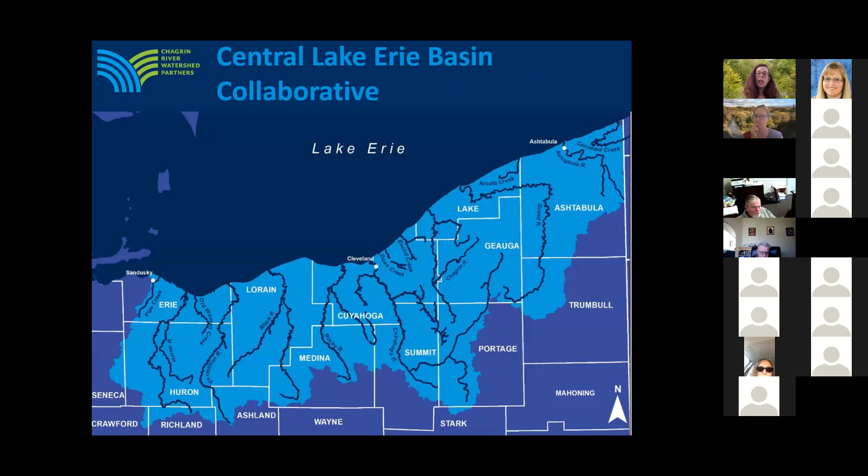CRWP really benefits from our trusted relationships with our member communities. Part of the reason we've been able to establish these trusted relationships include the following.

The first point is that CRWP is structured with a community membership model. Each of the members in CRWP have a seat on our board of directors. We've also been working with most of these communities for more than 20 years. For some communities we've been working with since our founding 25 years ago.

We work closely with a variety of city, county, and village and township departments, including mayors, councils, planning and zoning boards, the legal departments, the engineering staff. So we have a broad view of various perspectives in each of the communities that we work in. Many of our communities consider us technical experts, and they involve us in development and conservation decisions.

CRWP maintains a suite of model codes covering a variety of topics. If you're not familiar with the term model code, a model code is an example ordinance or zoning resolution that is a starting place for communities to use to enact their own regulations.

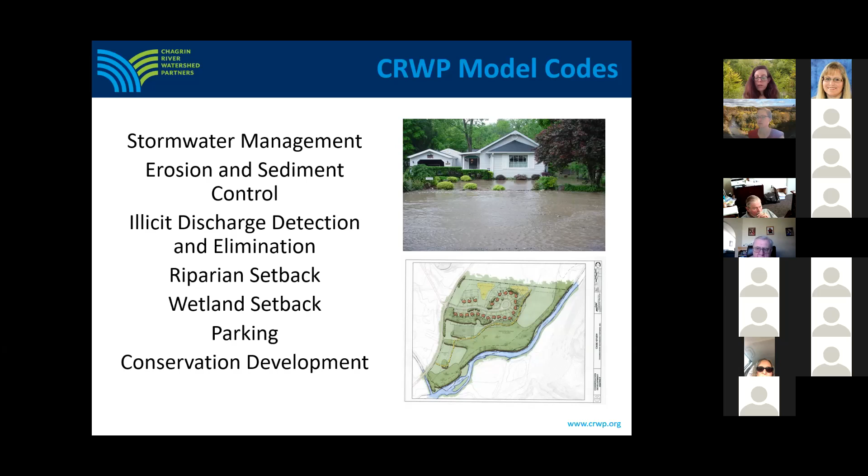Let me provide a little bit more detail about our conservation development code. If that's not a term that you're familiar with, it's a style of development that helps preserve open space by using a different distribution of lots. So instead of having a little bit of open space on each lot, as would be the case in a traditional development, the lots in a conservation development are smaller, and then there is a larger area of pooled open space.

This style of development results in less infrastructure to maintain. It can be done through a planned unit development code or as a zoning overlay. If you're interested in this, I suggest you check out our model code.

You may be wondering, why does CRWP have a parking code? What does that have to do with streams or stormwater management? Well, there's a direct relationship between the amount of parking that is required in your community and the amount of impervious surface in your community.

So we developed a model parking code that includes language that communities can use to make sure that their existing regulations are allowing for permeable paving materials, shared parking, and land banking. And if land banking isn't a term that you're familiar with, that means allowing land to be set aside so that it can be used in the future as parking if needed, but in the meantime, it can be natural vegetation or a landscaped area.

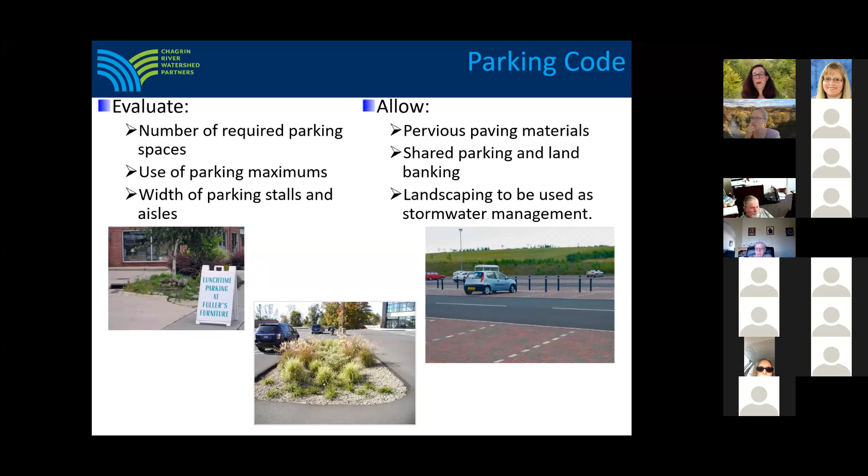We also suggest that communities look at the number of parking spaces that they are requiring to make sure that they are not requiring more parking spaces than are really needed, and to consider the use of parking maximums and consider reducing the width of parking stalls and aisles to reduce the amount of impervious cover in the community.

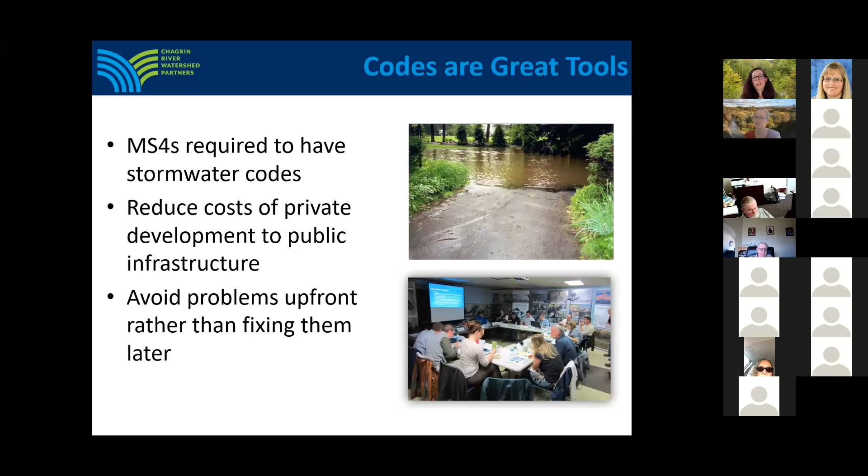CRWP thinks that codes are great tools. You can use them to reduce the costs of private development to public infrastructure and to avoid problems upfront rather than fixing them later. Furthermore, if you're an MS4 community, you're required to have stormwater codes anyway, so you might as well make them do as much work as possible for your community.

Speaking of requiring to have stormwater codes, if you're an MS4 community, you should be aware that you need to update your comprehensive stormwater and erosion sediment control codes by April 1st of 2022. How would you know if you need to update your code? Well, if you're using our model, you should update your codes. If you're not, here are some other things to consider.

The latest construction general permit changed the water quality volume. It increased from 0.75 to 0.9 inches, and there is now a new water quality volume calculation, which appears on your screen. If your old code has the old water quality volume and the old calculation spelled out in it, you need to update your ordinance to be compliant with the new MS4 permit.

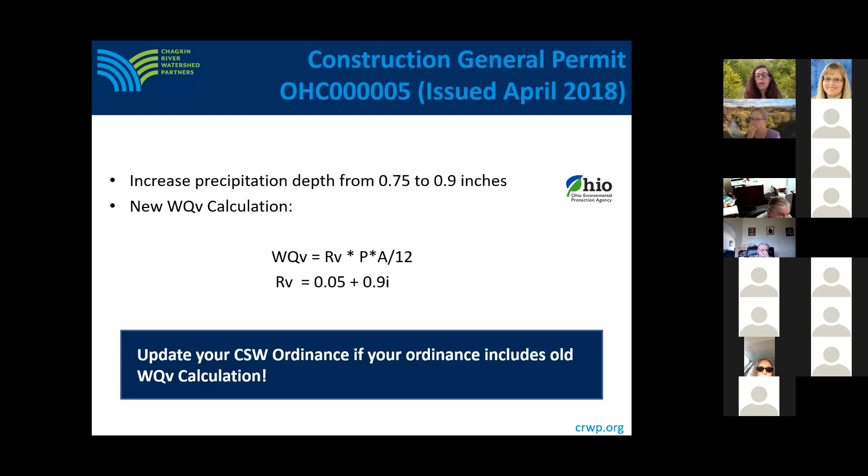Generally, if you spelled out everything in the construction general permit in your ordinance, you probably need to do updates to both of your codes to be compliant. If you didn't, here are some other things to think about. These are some general guidelines for what your erosion sediment control and stormwater codes need to have in them to be compliant with MS4 permits.

Your ordinance needs to allow you to require submission of a stormwater pollution prevention plan that meets the requirements in the construction general permit. At least you can go above that, but it needs to meet those requirements. It needs to give you the authority to inspect those sites. It needs to ensure that there is a mechanism so that inspection and maintenance will continue for the stormwater control measures that are required to be designed and installed.

You have to make sure that your ordinance says that not only do you have to come up with a plan, but those BMPs and SCMs actually need to be installed and functioning on the site. Your ordinance needs to have enforceable requirements and timelines, and you need to have penalties for noncompliance. If you don't think your ordinance has any of these things, then it's probably a good idea to revisit it and update it this cycle.

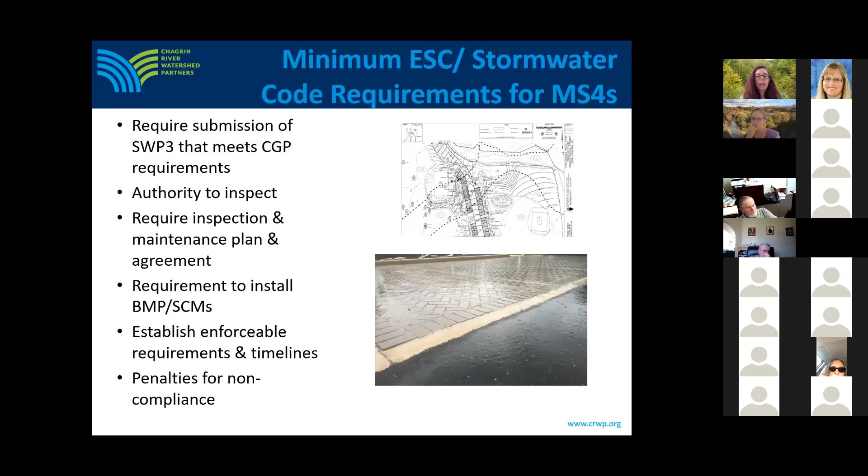So one tool that you can use to help you with that update is CRWP's Model Comprehensive Stormwater Code. Ohio EPA recommends the use of this model code for phase 2 compliance, and it's widely used throughout Northeast Ohio.

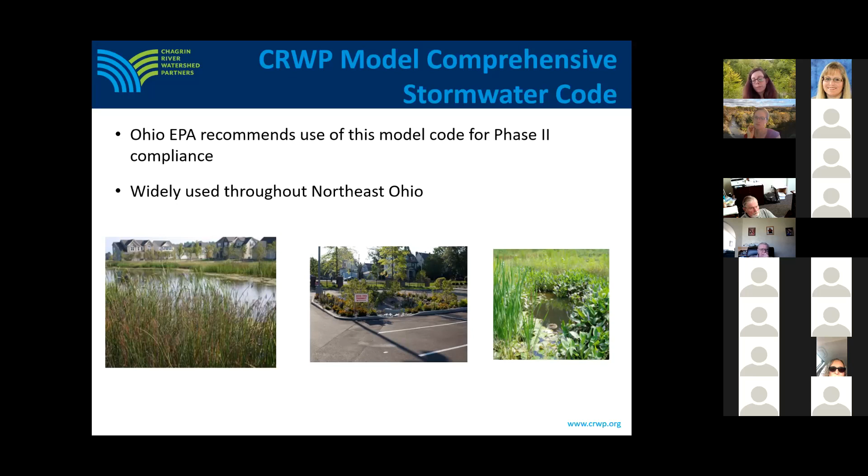This model was first issued in 2004 with updates each permit cycle since then. It's a collaborative effort of CRWP, Cuyahoga, Lake and Geauga Soil and Water Conservation Districts, and CRWP member communities, and has also benefited from insight and comments from ODNR and Ohio EPA. The early versions of this code were informed by John Aldridge, a consulting engineer.

The purpose and scope section is a brief overview of the overarching objectives of the legislation. The definition section in our model code now references all of the definitions in the construction general permit, and then we define additional key terms in the ordinance that are not defined in the construction general permit. We also define the construction general permit, since we're now using that term to reference Ohio EPA's construction general permit for our code. We include a disclaimer of liability and conflict, severability and nuisances, and responsibility section.

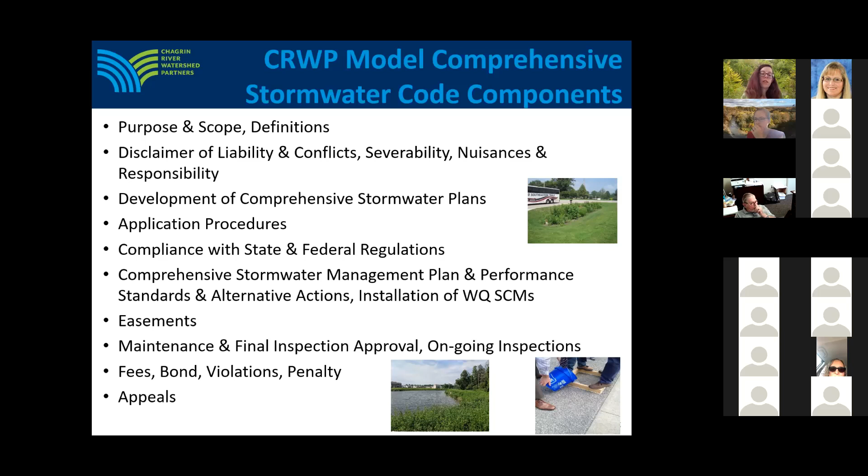Our model ordinance addresses both water quantity and water quality. So a lot of what I discussed so far deals with water quality, but our ordinance also has language about conveyance. Our ordinance states that open channel conveyance is preferred whenever possible, and it does have some language about storm sewer sizing for sites for which open channel conveyance is not feasible.

We also have stream crossing standard language that includes things like bridges shall be the preferred crossing for high quality sensitive streams. Our code also requires an inspection, maintenance agreement, and plan.

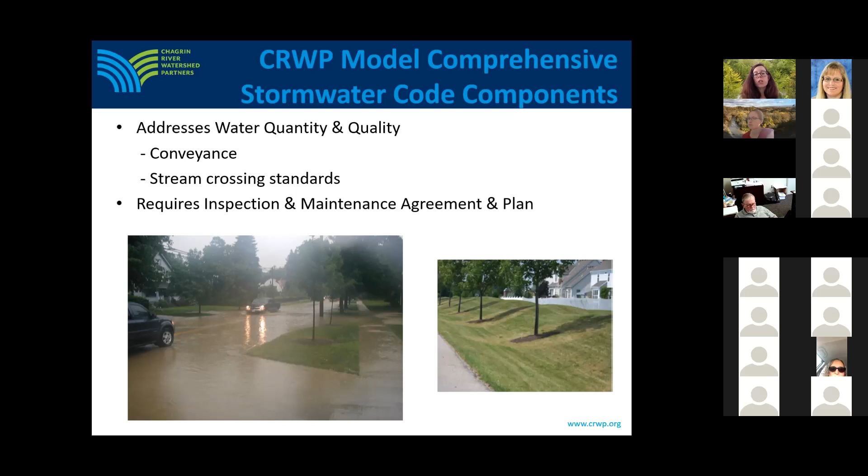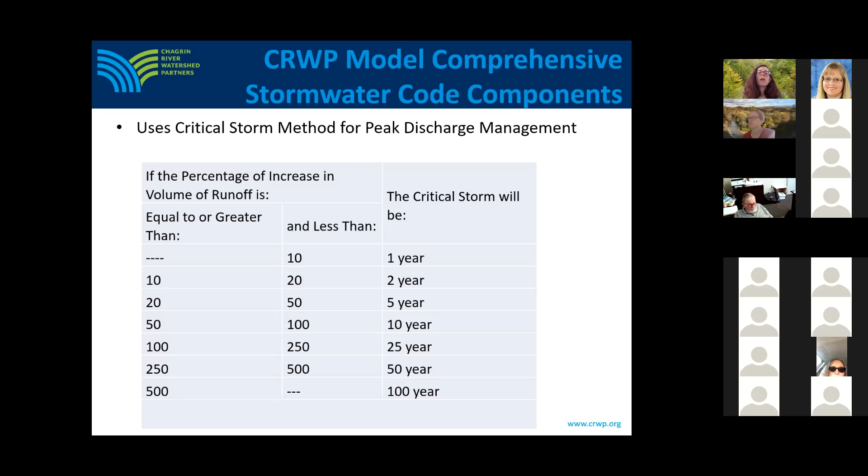Our code uses the critical storm method for peak discharge management. For anyone not familiar, this is a method that was published in ODNR's Stormwater Manual in 1980 that states that the peak discharge post-development shall be no greater for the critical storm, and every more frequent storm should be no greater than the pre-development 1 year 24-hour storm. The critical storm is determined by how much the volume increases post-development relative to pre-development.

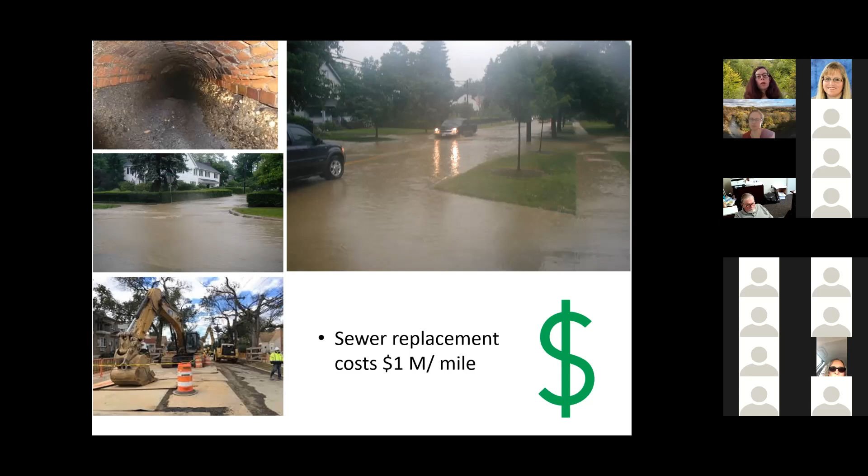Many communities feel like this is cost effective because other strategies such as storm sewer replacement can be very costly and very disruptive to communities. Furthermore, some communities, even if they're not currently having flooding problems, would like their storm systems to be as robust as possible because they've seen an increase in the amount and frequency of heavy storm events.

This slide shows data from the Great Lakes Integrated Sciences and Assessment Center, or GLISA, that shows that the period of 1981 to 2010 relative to the period of 1951 to 1980 saw a 22% increase in the amount of rain falling in the heaviest rain events and a 16% increase in the number of the heaviest rain events.

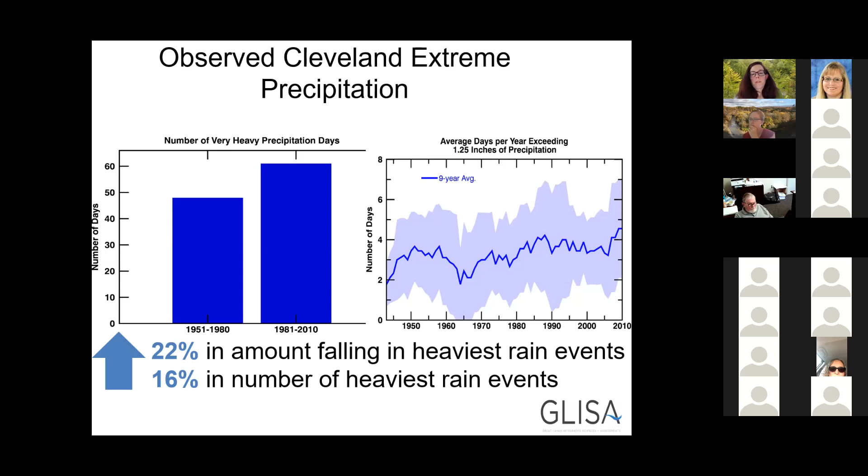One way you can get more stormwater management done on private property using your code is to require stormwater control measures for post-construction for sites disturbed less than 1 acre. This map shows a visual representation of how that could add up if each of these parcels are less than 1 acre, and as they're redeveloped with a stormwater control measure added in, you're getting that much more work done and that much more stormwater storage in your system than you had before.

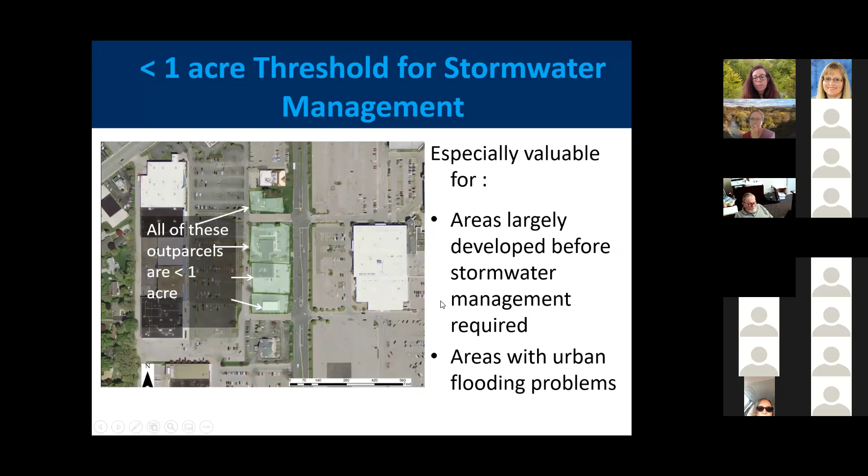If you're wondering has anybody else required stormwater management at less than the 1 acre threshold, the answer is yes. Locally, the city of Willoughby Hills and the city of Aurora, Ohio both require that all industrial and commercial development that requires a site plan complete a comprehensive stormwater management plan and install stormwater control measures. Additionally, the city of Lakewood requires a comprehensive stormwater management plan for site disturbance greater than 8,000 square feet. Nationally, there are many communities that have even lower thresholds at which stormwater control measures are required.

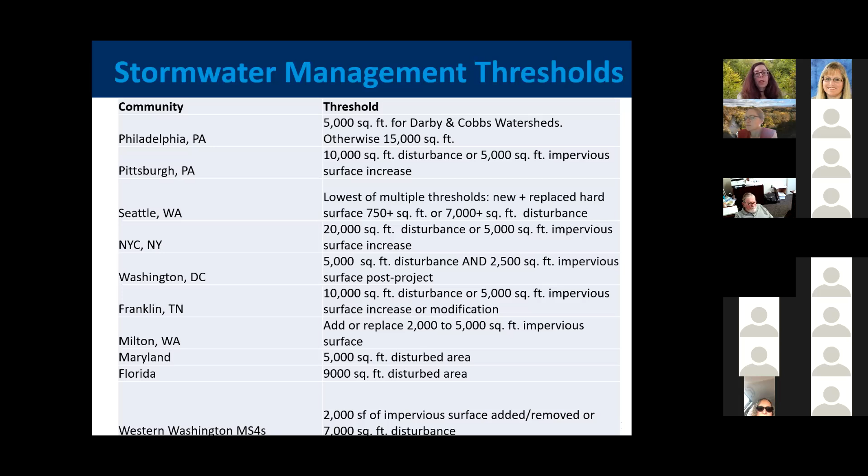At the stage of the draft MS4 permit, Ohio EPA was considering giving communities only 6 months to update their codes, and we know it's very difficult for communities to complete ordinance updates on those timeframes. So we wanted to make our code such that it minimizes the amount of updates required in the future. Another benefit is that there will no longer be a lag between changes to state and local regulations. For example, right now in a lot of communities, local regulations say you must manage a water quality volume of 0.75 inches of rain, whereas state regulations say 0.9, and this change will automatically make those types of changes consistent.

Another change we made to our code was including something in our performance standards section that will meet the requirement for MS4s that have TSS and nutrient TMDLs for MCM5 by requiring green infrastructure where feasible. Communities that have total suspended solids or sediment or any nutrient TMDL are required under this MS4 permit to do one of 4 things.

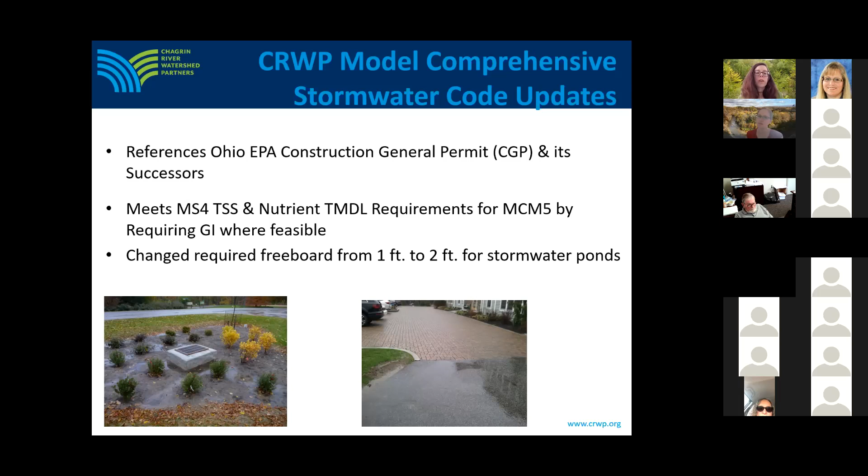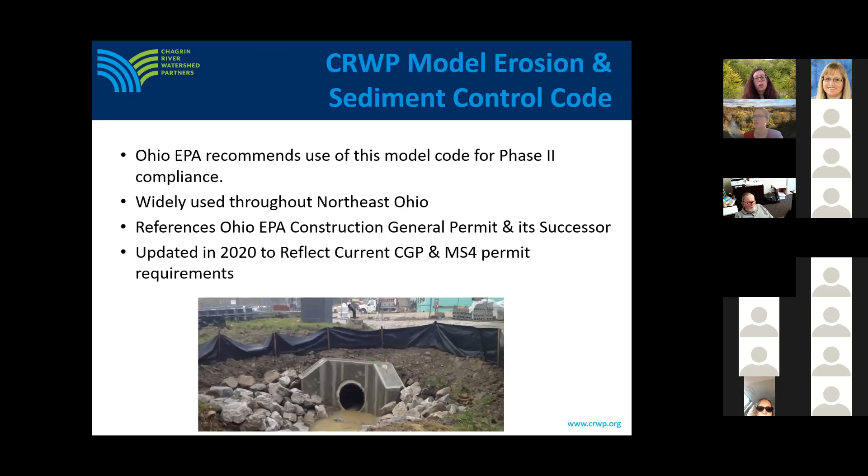Now moving on to our model erosion and sediment control code. Like the comprehensive stormwater code, Ohio EPA recommends the use of this code for phase 2 compliance. It is widely used throughout Northeast Ohio. It now also references the Ohio EPA construction general permit and its successors, and it was updated in 2020 to reflect the current construction general permit and MS4 permit requirements.

The first version of this code was issued in 2001. It's a collaborative effort of Chagrin River Watershed Partners, Lake Soil and Water Conservation District, and member communities. It's been reviewed by Ohio EPA for phase 2 compliance, and like our comprehensive stormwater code, this code has really benefited from suggestions and insight from all of our collaborators on the code.

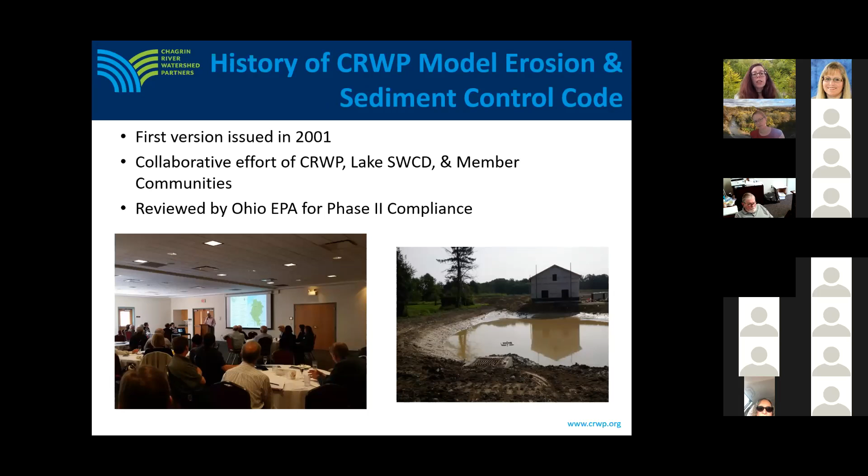We have an applications procedures section that states that a pre-application meeting is required and the submittal requirements.

We have a section on compliance with state and federal regulations that requires that the plan include evidence that the site has submitted its NOI for construction general permit coverage and has any needed 401, 404 isolated wetlands and ephemeral stream permits from Ohio and the Corps, as well as compliance with the dam safety regulations if applicable.

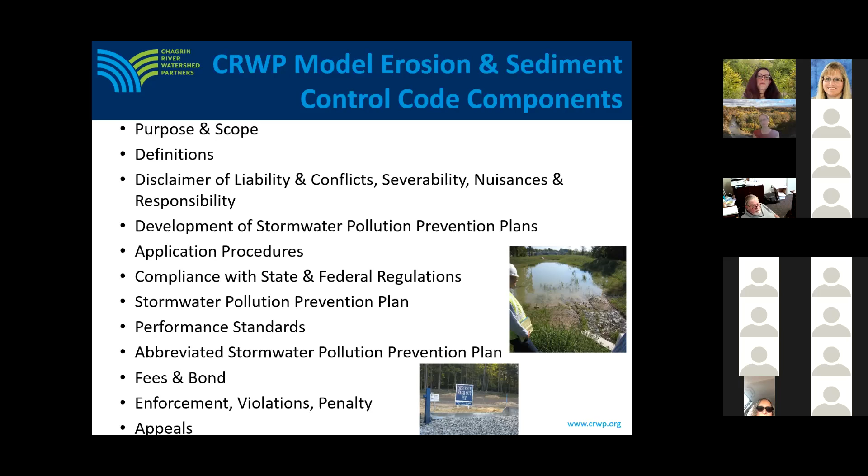We wanted to make it easier for communities to have to do updates less frequently, and we wanted consistency between local and state regulations. Our code now also includes mechanized clearing as a trigger for a SWP3, and we removed the agricultural exemption. We did this because we learned that some soil and water conservation districts were treating mechanized clearing as a silvicultural harvest under the agricultural rules, whereas Ohio EPA considers mechanized clearing to be the first step in the development process. So we changed our code to align with Ohio EPA's guidance.

We also added that property owners need to submit a SWP3 for offsite support facilities, such as spoil locations or asphalt plants, before they start using such offsite support facilities.

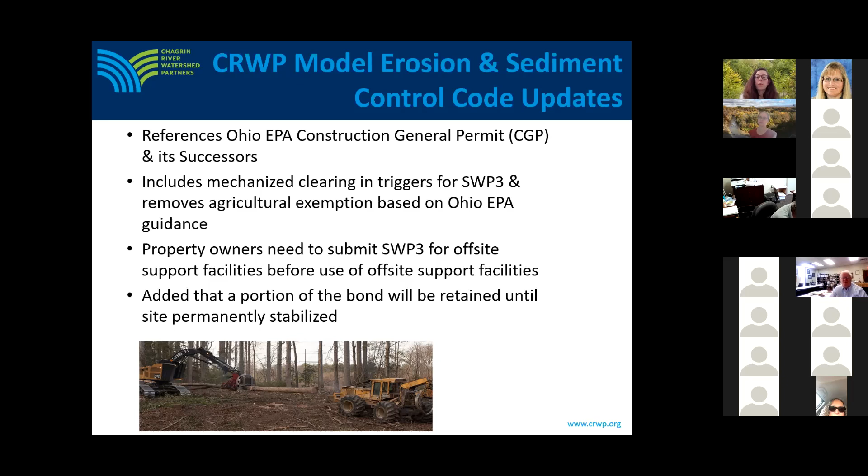We also added a section in our code that relates to the requirement in the MS4 permit that MS4s need to conduct inspections every 14 days instead of monthly if sites have certain deficiencies. Those deficiencies are: construction activities have started at the site with no SWP3 completed, or the property owner has failed to install the sediment basin when the SWP3 clearly indicates that should be the first step, or they have failed to implement any sediment or erosion controls, or dewatering activities are resulting in turbid discharges.

And because MS4s now have to inspect those sites more frequently, we added language in our code that allows MS4s to pass those costs on to the property owner by having them pay a $250 additional fee for each additional inspection conducted because of those issues on the site.

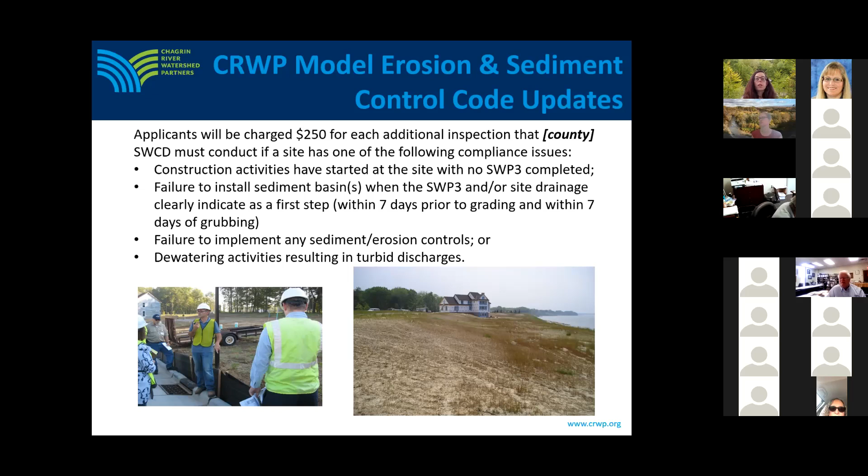The last code I'm going to be covering in detail today is our Riparian Setback Model Code. As a reminder, riparian setbacks count as a post-construction BMP under MCM 5 for phase 2 compliance for MS4s.

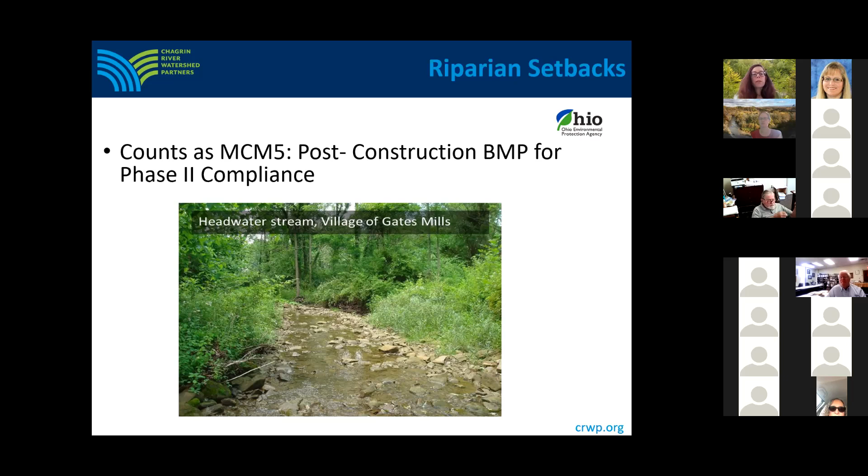I'm going to begin by reminding all of you of some of the services that healthy riparian areas provide. Healthy riparian areas have root systems for trees and bushes that help hold stream bank soils in place, limiting stream bank erosion. They also help reduce downstream flood impacts by slowing water velocity and enabling water to soak into the ground on the floodplains.

They filter and trap sediment, nutrients, chemicals, salts, septic discharge, and other pollutants, protecting surface and groundwater quality by acting as filters. They influence temperature by providing shade, which is particularly important for cold water streams but important for all streams. They help reduce aquatic nuisance species and enhance wildlife habitat and biodiversity.

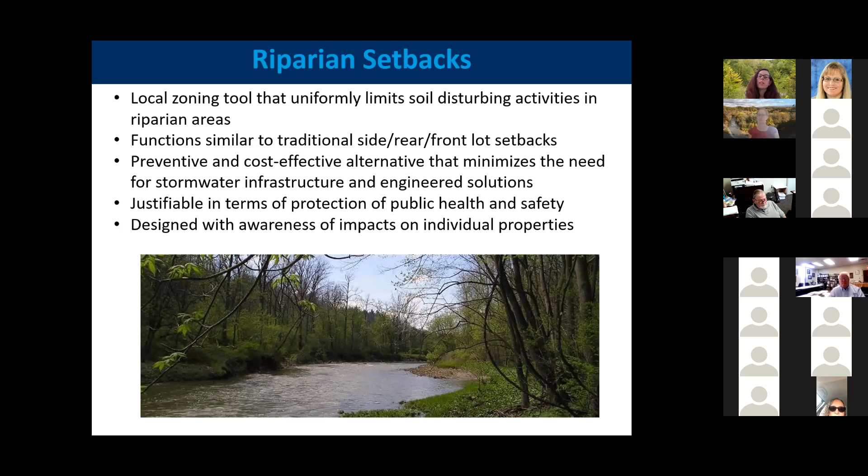I'm sure many of you are aware of situations where houses have been built too close to streams and structure flooding and potentially loss of life have resulted, or structures have been endangered because of stream bank erosion.

But adopting riparian setbacks allows communities to maintain the free services that riparian areas can provide as land is being developed. So communities with riparian setbacks continue to get benefits for flood and erosion control and water quality improvement, even as development occurs. They lower the cost to residents and communities by keeping homes and other infrastructure out of the path of ever-changing streams, as well as reducing public health and safety concerns from flooding and structural damage from erosion.

Sometimes communities worry that implementing riparian setbacks will lower property values in their communities, but the research shows that is not true. In fact, some studies show that implementing riparian setbacks actually increases property values in a community.

Our model setbacks are based on the drainage area of each stream. A stream that drains less than a half square mile and has a defined bed and bank has a 25-foot setback measured from the edge of the stream outward in both directions. Streams that drain between a half mile and 20 square miles have a 75-foot setback, and streams that drain between 20 and 300 square miles have a 120-foot setback.

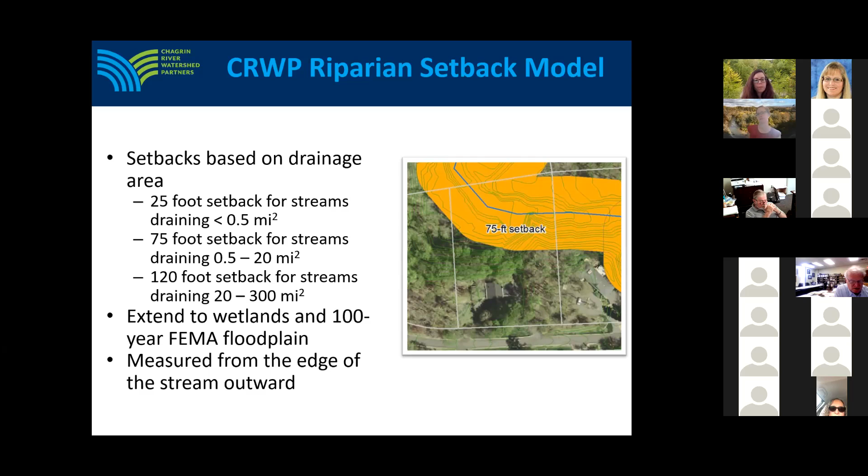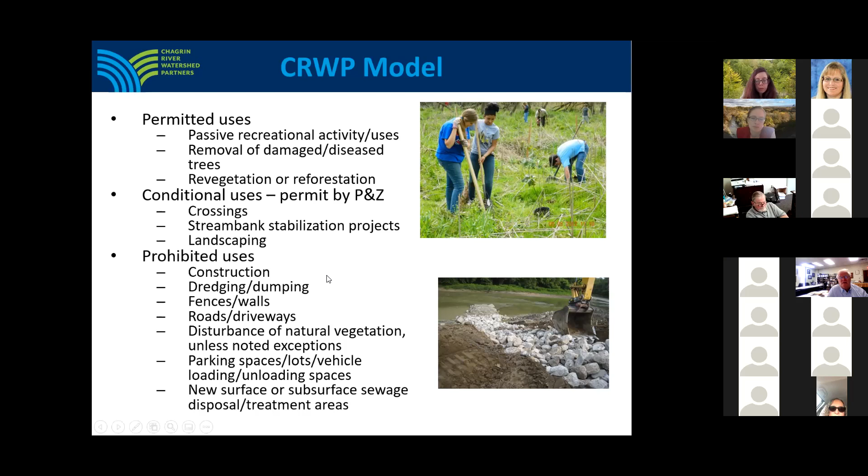Our model includes a listing of activities that are permitted, prohibited, and conditional uses under this regulation. So for example, riparian revegetation, the top picture, is a permitted use, whereas a stream bank stabilization project, such as installing a bendway weir, would be a conditional use that could be reviewed and approved with a permit from Planning and Zoning Commission.

Our model does not apply to existing structures that were in existence prior to the riparian setback being in place. Sometimes people worry that it's going to require houses that are already too close to streams to be torn down, but that's not the case. Those existing uses are grandfathered.

We do recommend that communities provide variances to other setbacks first, so that they would first flex side, front, and rear setbacks to maintain the riparian setbacks.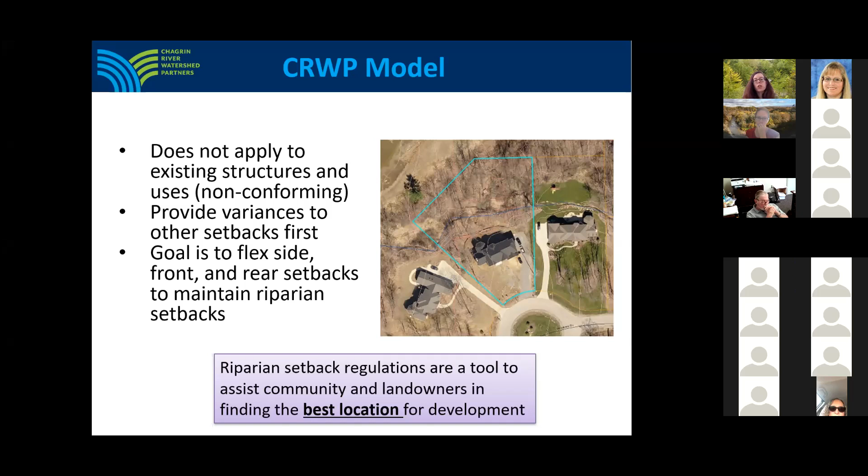This slide provides a little bit more detail about how pre-existing buildings and structures are affected by riparian and wetland setback regulations using our model.

Our model would allow expansions of homes that don't encroach further into the setback, but if a property owner wanted to encroach further into the setback with an addition, that would require a variance.

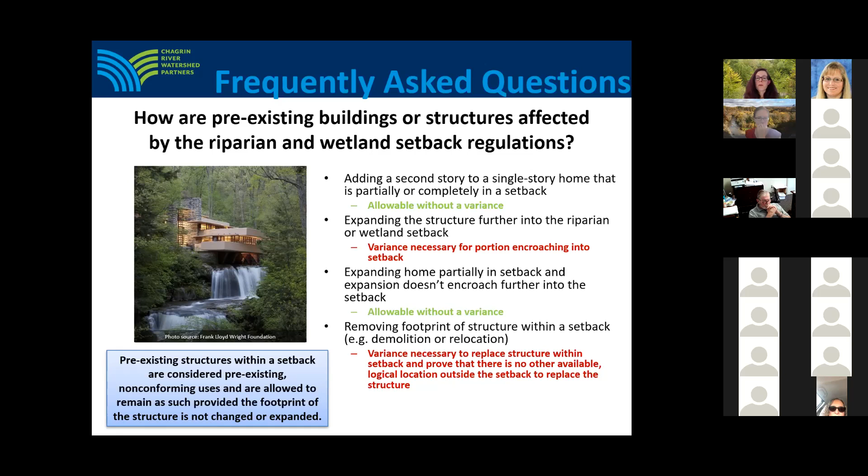If a property owner tore down their home and wanted to build a new one, they would need a variance to put that structure back where it was if it was within the riparian setback. And they would need to show that there was no other logical location where the new home could be built on the parcel in order to get that variance.

We suggest that communities use the best available data when creating those maps, but also include language indicating that the map is a guide only and field conditions always prevail. We suggest that communities update their maps as needed if they become aware of discrepancies between field conditions and the maps.

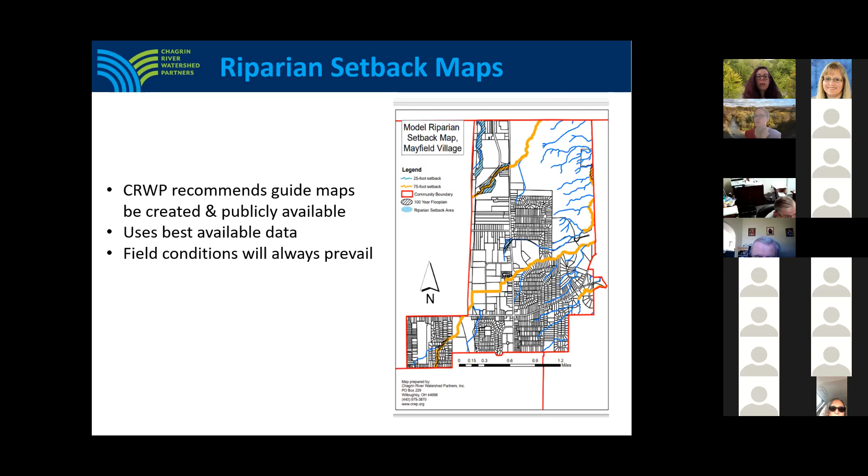I'd like to thank you again for the opportunity to present to all of you today, and I'd like to take any questions at this time.

Keely, there's a question in the chat: is the amount of $250 listed somewhere in the new permit for penalty, or new MS4 guidelines? No, the MS4 permit does not require you to charge a fee for doing the additional inspections. It just requires you to inspect more frequently. We just added language to our model that allows you to recoup those costs. If you don't like that, you could take it out when you adopt your ordinance.

Are there any other questions? Yes, I have one question.

In a riparian setback, if there's a bunch of down trees and sediment that has built up and dammed off the flow of natural water through the riparian setback, is it permissible to go in and have those trees and debris removed, or do you have to go through the Army Corps and permitting process for that type of work?